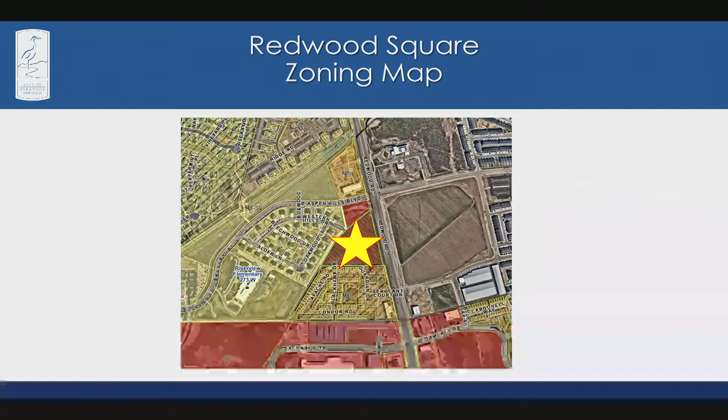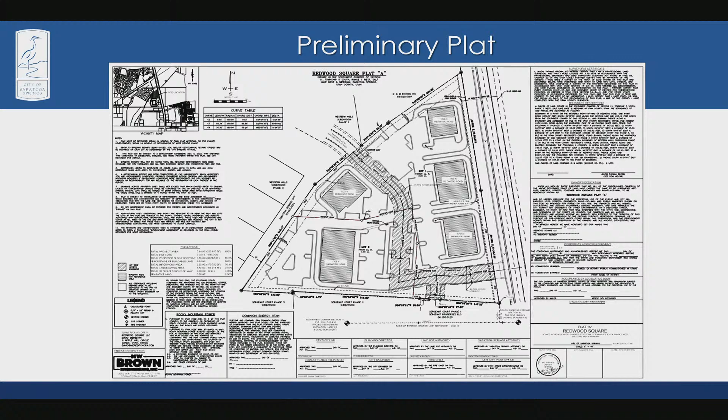The plat does show 5 buildings, 2 lots, and then the main road that goes through there is also designated as an easement, so that would provide access through the development.

And you can see here the parking does meet our code, as well as the other site plan requirements.

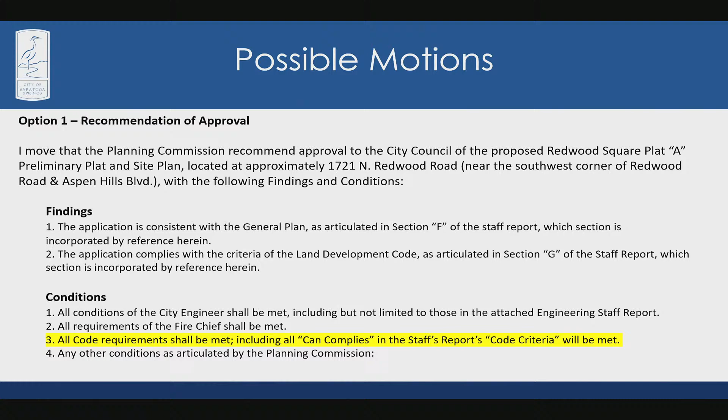There were some other comments in the report I wanted to address. One was in the traffic study, which mentioned that a two-way left turn lane should be installed on Aspen Hills Boulevard. The plans submitted did not show that, but that was what was recommended in the traffic study.

And then the other comments I wanted to cover: they just need to add a note to their lighting plan to make it compliant. And when these businesses come in, they will have to submit a sign permit application, since they don't know what the tenants are at this time. So that addresses the comments from the planning side.

That highlighted motion addresses that in the recommended motion. The developer is here, so I don't know if they have anything else they'd like to add, or if you have questions for them.

Thanks, Austin, for the presentation. Would you like to add anything to the presentation this evening as the applicant? If you would, please state your name and address for the record.

Yes, my name is Jared Osmond. I'm the developer helping the owner. I'll be his contractor as well to build it. I live at 11509 South Black Forest Drive, Sandy, Utah.

As you know, we've been working on this a long time. It's something I'm very excited about. The owner is a friend of mine, and I'm excited to see him buy this property from Steve Metz. Matt Brown, our engineer, has been engaged with this.

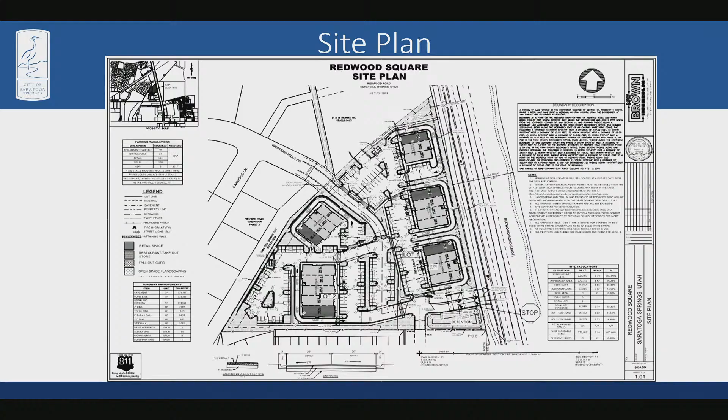A lot can comply, and I think those will be taken care of - the lighting and some of those types of things. But in my notes, the big question for me was transportation and the things we've been talking about. So Kent, thank you, and Austin, thank you for giving some insights. Chair, that's all I had.

All right, thank you, Commissioner Hill. Appreciate your questions and comments. Commissioner Mangum? Thank you so much.

Appreciate this. I just want to make sure I'm understanding this correctly. So the property owner on Western Hills Road is the fellow that will not give you the easement when he already has the road?

That's the comment I would like to make. It's the same thing with the subdivision I did across from Costco at Riverview. We have a point that has an easement to it. The developer hasn't started, and until that happens, we know it's going to happen. This guy can't develop his ground without signing that easement. He's looking to sell it to a developer. The easement's there, the road will go in, it has to go in. He will never receive any validation from you or city council unless he agrees to that.

So it's not that it's not going to happen, we have plenty of time. He's actively trying to sell that property, and I think he will. The next developer that builds whatever he's going to build there is going to have to get approvals, and that will happen. We've allowed an easement to happen, our easement is signed, but now we're being held hostage, loosely speaking, not by you, but by this other owner. We have no control, but eventually, as you know, it will happen.

It doesn't really make sense for us to widen that Aspen Hills Road either, when we don't own it and we can't take away amenities. But you'll have that access point. We've got the one to the south, and the one onto Redwood Road is there.

We need to clarify, let's look at this map here. So there's actually two access points on the north, so this is kind of confusing. There's this road here, and that's okay, I guess. So it's actually here where he's connecting into another, what will be a future commercial property. And so I guess this guy doesn't want to do anything until he sells it. Okay, that's what I wanted to clarify.

So, correct me if I'm wrong in legal, but I think that could be a condition of approval, that they have that agreement signed, that they work with the developer to the north at the time when that goes to be developed. That could be a condition of approval, that a cross-access easement is worked out between the two.

Okay, I would think that if you make it a condition on the empty lot, the triangle just up to the north, that he can't develop it until he does that, then it will happen.

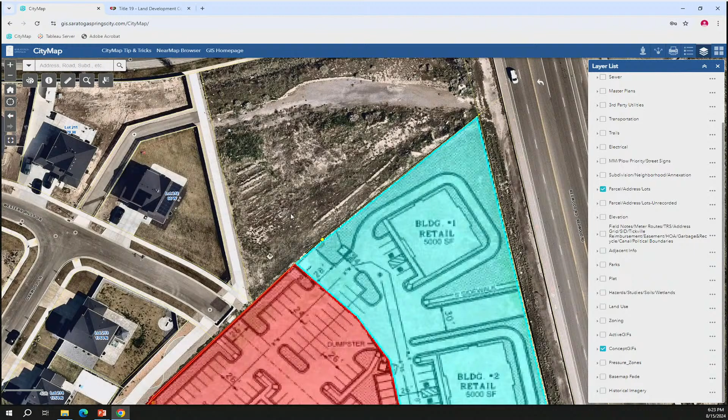Yeah. And then the other point, so if I'm understanding correctly, you do not have a lane off of Redwood Road for the cars to pull off and slow down? My understanding is that there's plenty of room for cars to pull over, and we just don't have a dedicated lane. Gotcha.

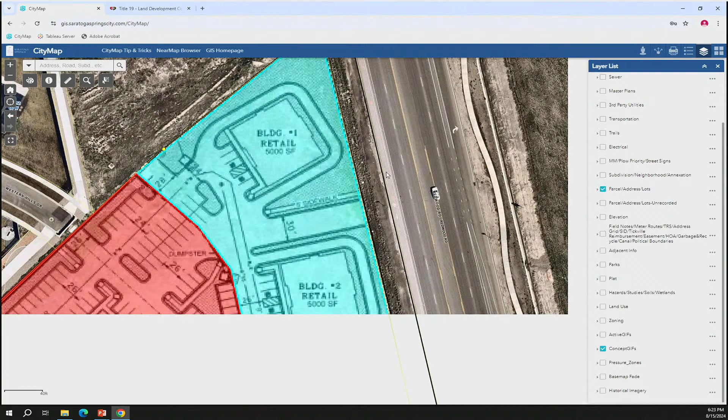People will actually use that turn-on lane, and UDOT's comfortable with it. Otherwise it would be an issue. So I don't think that's a sticking point, in my opinion, I'm not an engineer, but I don't think it's a big deal, just not a dedicated lane. Gotcha, that's all, thank you so much.

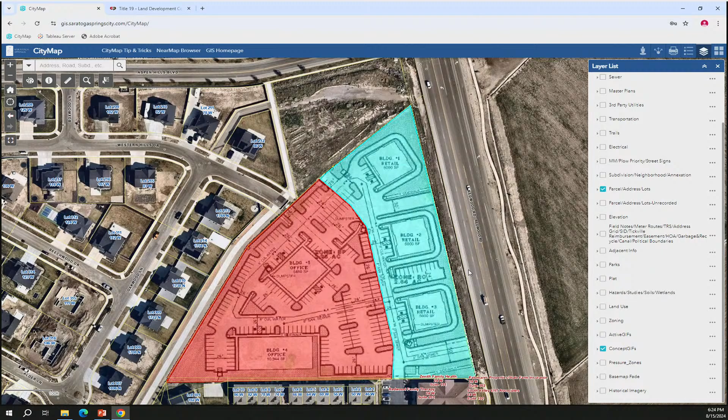Commissioner Sprosty Burns. So where you've put that stub off into that property, where they won't sign the agreement with you, does that, and this is kind of some speculation here, but does that drastically affect the usage of that other property? No, not at all, because they know that they're not going to get their development done. This is the discussion with him now. He knows he's not going to get it done until he has that access, he realizes he needs it for himself.

That lane will exist regardless, it has to. But where it's stubbed at is like through its thickest, or fattest part. As a developer, I would put my building closer to the road, and all that would be parking, and that lane would be absorbed in the parking, which would be an access.

You could direct that road closer to the property line once it comes out. You could put a garbage trash bin back in that corner, or utilize the ground either for landscaping requirements to meet the minimums, or some way. I don't think it's going to affect him at all, and I would expect that as a developer myself. You have to have these access points, but you just can't control somebody that owns it.

Right, yeah, absolutely. And that was actually located off of a concept plan that was submitted to the city in 2019 or something. And there's so many easements on the north, with everything that's come across there, that pretty much limits where you can build the building to that sort of northeast corner. They would be very limited to what they could build, obviously, for the square footage and the parking requirements of whatever's going in there.

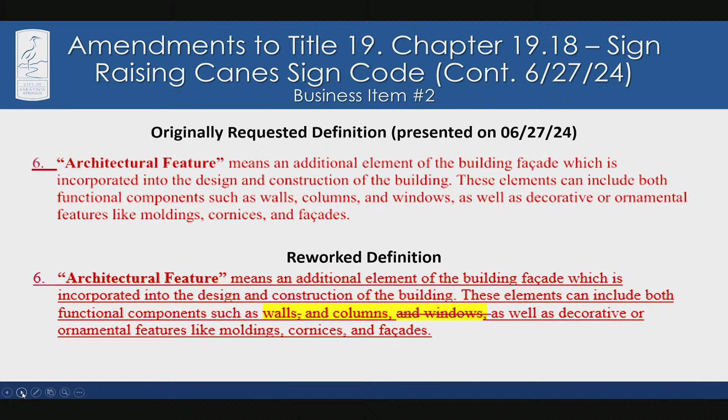So all of this verbiage now is their request. It's just the city went back and said, hey, let's see if we can tighten that up a little bit. Also, the sign definition is looked at with the addition of exception architectural elements. And then, we probably should say the same word there, architectural features, or that become elements. One way or the other, we need to make those come together.

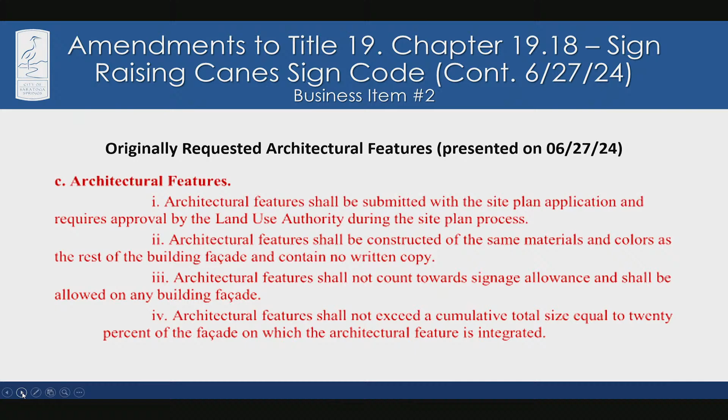The original request is shown here, and then the changes that have been reworked include that architectural features shall be constructed of the same materials and colors of the rest of the building facade, and primary colors are prohibited. So that tightens that up a bit. Architectural features shall step portions of the feature to create shadow lines and changes in volumetric spaces of the facade, and shall not project more than 12 inches vertically and horizontally beyond the structure. And further, it's only allowed on one building facade, and only 10% of one facade could be permitted. So that does tighten up the language a bit.

I have to say that staff is still recommending denial. We feel like the code is good as is. However, this is their request. We do feel like the request is better than what it was, and so we're not strongly or vehemently proposing denial, but just the mere fact that we feel like, to protect our vision for signage and architecture in the city, we feel our code is good the way it is. So if there's any questions, I'm here, or Crystal can take questions.

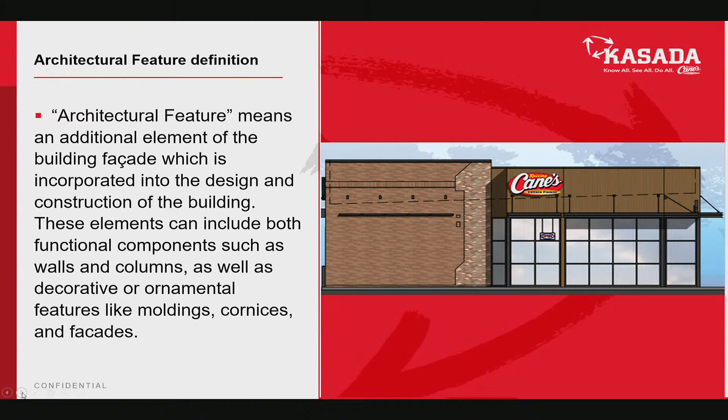It stands, let's see, I've got the dimensions. As you see, it's going to be as tall as the building, but it's 21 feet, 10 inches tall, and it does project out 12 inches. Here is that a little bit larger elevation.

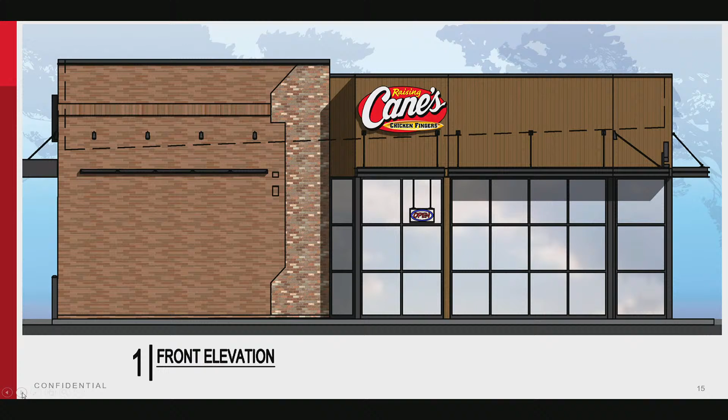So you say that would be 12 inches out from the existing facade? Yes. Okay, so that's a foot. Yeah, and that's what, when I was here more than a month ago, every question or concern that you guys had, we tried to address that.

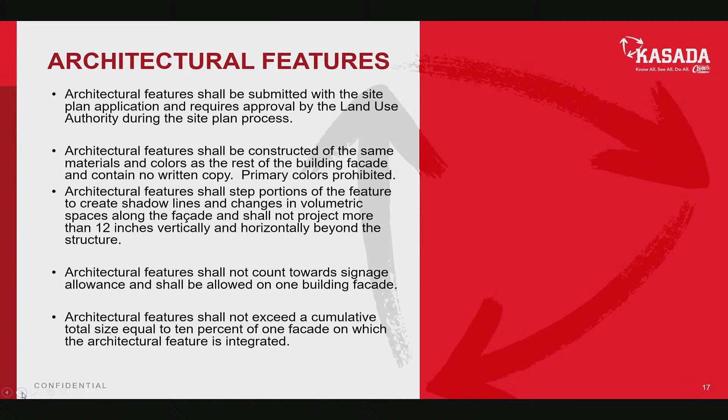We've got a couple questions, but maybe if you want to get through the next couple slides, then we'll turn it over. There's this one that shows every side of the building, the building elevation complete. And then that is just restating exactly what Ken had read, that Gina and I and our team talked through and cleaned up the language. And that's it.

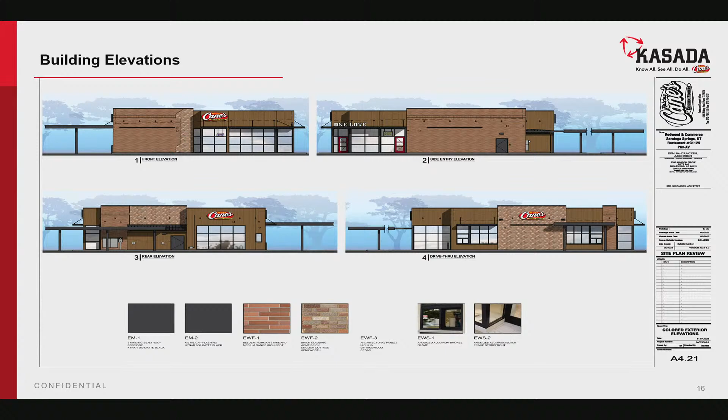And I think that's more disruptive than this, and if our goal is — and I totally understand the city, we can't anticipate what some people will interpret in good faith. They're not doing it to be bad. It's their business, and they have to market it, and they want some brand recognition. So I understand that, but we already allow that to happen when it comes to visual clutter with the signage code that we are comfortable with. And so I feel if that's the case, we're going to have a big red and yellow sign — not a big one, a small, proper sign on a brown building — then why don't we allow for something like this where it is tasteful, it shows your brand, and at the same time looks like an architectural feature.

And by the way, last time I really liked what you said about architectural features, but then I realized that restaurants like Neaters could have a fireplace, and they could call that architectural, but then the next person who comes in may decide to rip the fireplace out. So it doesn't really matter if that architectural feature is actually something that has to be load-bearing. It doesn't have to. Right. So we could call it an architectural feature for the purpose of bringing in signs in some way, without it having to be like a load-bearing wall. It could be like a fireplace or a column like this.

So I've kind of changed my thinking on it quite a bit, but I do want the city to be able to bring some of this in. This wouldn't stand out irregularly in Park City — it would look good in Park City even. And Park City is very restrictive, so I think, I don't know, I just want us to be welcoming for something like this.

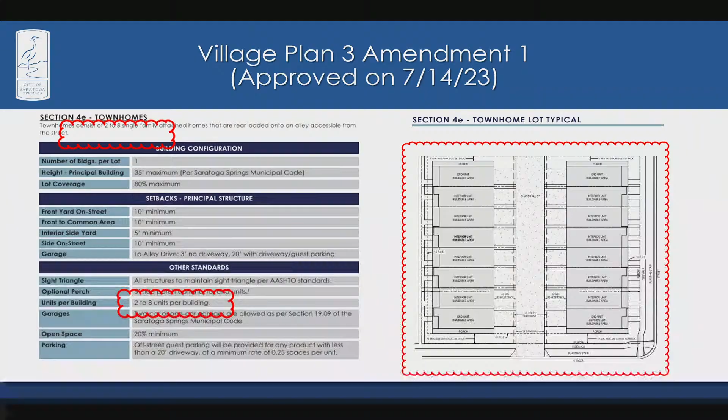Thank you, Director Young. Would the applicant like to add anything to the presentation? No. Okay, thank you for being here. We appreciate that. This is a matter of public hearing as well, so we'll open it up for public comment at this time. Have we received any public comment on this matter? No. Hearing none and receiving none, we'll close public comment and turn it over to members of the commission. Commissioner Hill.

Thank you, Ken, for the presentation, and thanks for a full packet of information coming through. City found that everything is in compliance. The one question I have is these townhouses will have 2-car garages and then the driveway, giving a functionality of 4 spaces. The only question is, even though the total area is not changing in density, the neighborhood is going to change a little in density from 6 to 8.

The one question I have is always parking. What happens if you've got more? My whole thought is you may have a garage, but most people don't use it, that's storage, especially in a townhouse. If you have 4, 5, 6 people over, where would they park? I didn't see it in our drawings, but is there a concern of having adequate parking with 8 units right across from one another? That'd be 16 units. That's the only question I have, Tim.

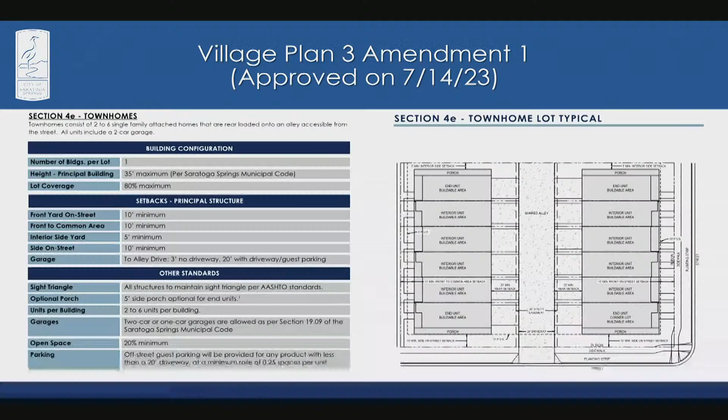I think if you go back a couple slides to where the actual map is, Commissioner Frosty Burns was doing me a solid here and showing me the difference. It's hard to see on the screens, they're a little far away, but there are some parking stalls, Commissioner Hill, on those half circles. Yeah, the half circles that you see there. It's a good question.

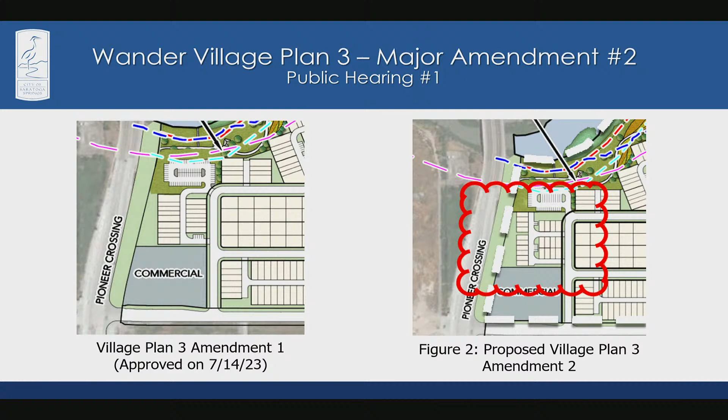Okay, thank you, Commissioner Hill. Any other additional comments or questions? Any other members of the commission for questions or comments? Commissioner Kilgore. So when I was reading the staff report, I didn't see anywhere where it said that density is not affected. So I just assumed it was, because if you're going to go from 6 to 8 units, then I would assume that that does affect density.

When we were talking about ADUs, we were concerned about parking and such just by converting half a home or part of a home into an ADU. And now we're adding 2 units with families and everything else. So I could see that there was parking there, but I didn't think the parking configuration had been changed. So has that been changed to increase as well, or did it stay the same as before?

Oh, well, the applicant, yeah. I mean, like was said, once again, this is just the request for the village plan. And when we actually go through and plan this out so that we have it recorded and we're going through the plat process, we'll make sure that we have the parking adjusted at that time to meet parking requirements for the city and for the homes. So then there is a chance that parking has to be adjusted then? At this time, I don't believe there is, not according to our discussions with Gina. But that may change in the future.